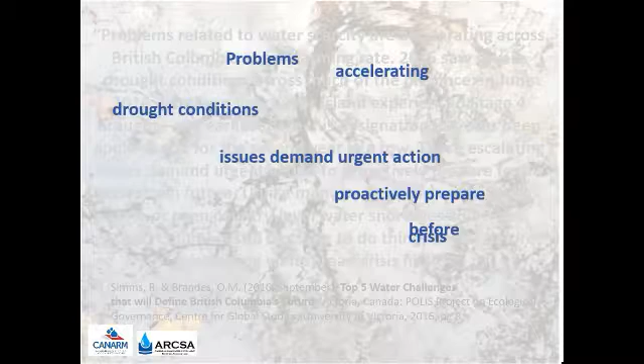The POLIS Project has just published 5 water challenges to define British Columbia's future. I've taken a paragraph and it talks about the problems, drought conditions, issues demanding urgent action, being proactive and preparing for the future, before there is a crisis situation. And so all of these together are kind of the focus of my relationship with rainwater harvesting and how this fits into the POLIS Project. Now the top ones here, that problems are accelerating, there's drought conditions, these are obvious and noticeable. Everyone talks about it, it's in the news, it's everywhere.

When we look at the issues that demand urgent attention, we can sometimes say, what can I do? What should we do versus what can I do? And then there's not just I, but what about we and what about they? And all of these different forms of the question come up. Then we also ask the questions, what do we do? What do we consider? What do we need to know yet and learn? All of these things kind of come out of that. The issues demand urgent attention and action, but where do we go from here?

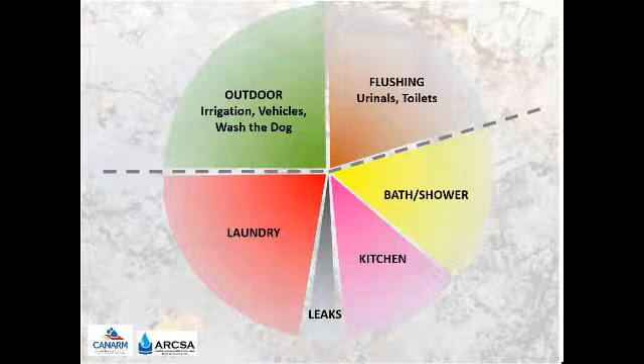And yet there are things that are happening. This conference on Living Waters Rally, the Watersheds 2016, Rainwater Day at the CanWest, the legislation changes, discussion and education, these things are underway. And we're looking now specifically at the new rainwater industry that is developing awareness and education, training, accreditation, and certification in this very, very specific area of expertise. We're going to start with the knowledge that roughly half of our potable water currently goes to outdoor use or flushing, and we can change that by using rainwater to fill that.

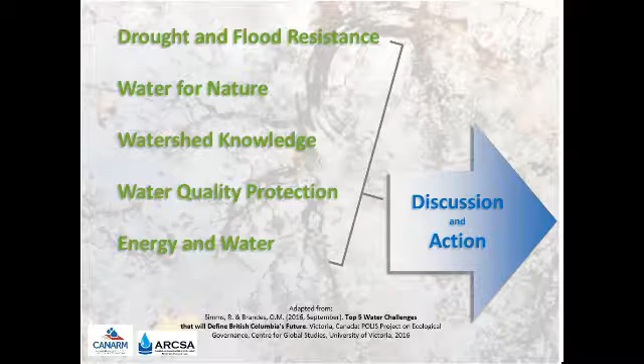One of the things we have to face is that there are many, many groups, many different aspects, many different facets and faces to rainwater harvesting, and it just covers so much ground. That makes it complicated, and being able to work within those regions, within those rules and regulations, to help develop new ones. And as the POLIS Project breaks down into 5 main topics, leading to discussion and action and leading into the future as they have been doing over the past while, it's really, really good to see how this is developing. I want to make the case that rainwater harvesting will directly address 3 of those areas for sure. The insert says it's rainwater harvesting.

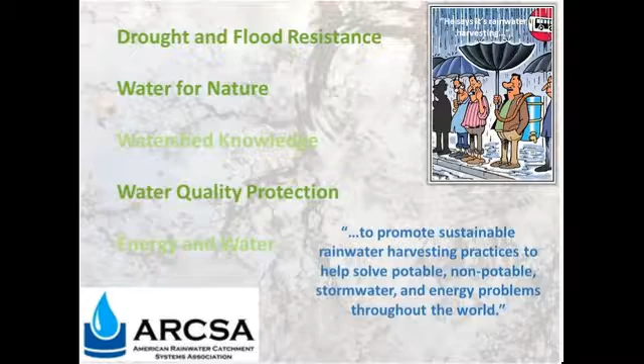We have organizations. One I work with is CanArm, Canadian Association for Rainwater Management, bringing awareness, educating, conducting research across Canada in rainwater harvesting and best practices. So this is kind of the north of the border aspect. The south of the border aspect, but also international, is the American Rainwater Catchment Systems Association, promoting sustainable rainwater harvesting practices. And they are leaders. They've been doing this for over 20 years. And so we're working with them to bring education and training here into Canada.

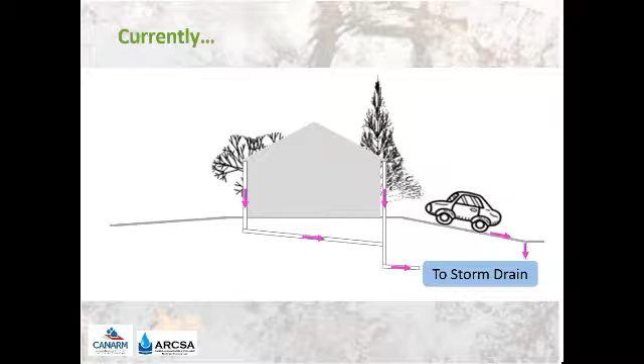So where we used to have pristine nature, we have now modified that dramatically and taken what rain falls on the land and on our roofs and put it into the storm drains and pushed it off someplace else. Rainwater harvesting wants to address the drought and flood resistance aspects by saying, let's interrupt that flow from the impervious surfaces and runoff going to the storm drain. Let's interrupt that and put it into rain gardens. Let's use pervious pavements and put that water back into the ground. When we consider that, there's also, in the landscape sense of things, using less water, conserving. Using drought-tolerant plants and using no lawns, or letting lawns go dormant, not using as much water. For rainwater harvesting, specifically in those areas, one, it's an alternative source.

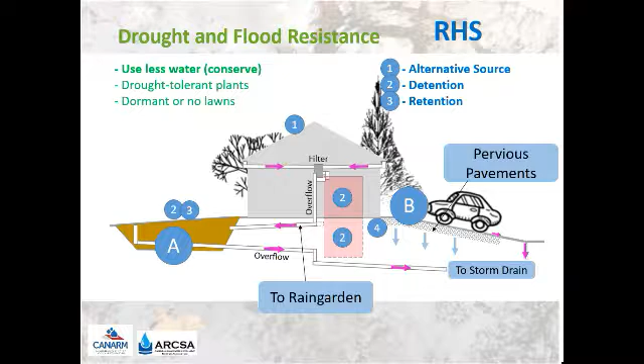Two, we can practice detention, where we're holding water back on the site and not rushing it off into the storm drains. And three, retention, where we're putting it into the ground. Now, further to this, we can also add cisterns or tanks above ground or underground and use that same type of system, store more water for later use when we don't have the water available to be used for the various aspects we want to. This way, we're improving also on the detention aspects quite substantially. Rain gardens do as well by absorbing water like a soil sponge.

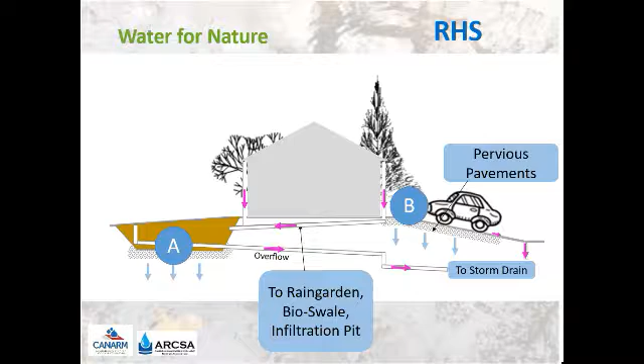Water for nature is another aspect that we could look at. The pervious pavements, of course, and the infiltration into the ground. Planting trees is a great way of keeping water in the environment rather than pushing it away someplace. It goes back into the environment through evapotranspiration. Trees also, and plant material of any kind, really helps water get down deep into the ground. Mulching planting beds so we don't have evaporation, using sheet flow and on-site infiltration. And of course, evapotranspiration is big because nature's cycle is water going into the atmosphere and then coming back down onto the built environment and the natural environment.

So again, we have the alternative source. We have detention, retention, and infiltration in many different manners: rain gardens, bioswales, infiltration pits, and pervious pavements. The overflow, of course, goes to the storm drain or to some other storm system that has already been there and usable. Also, again, tanks can be added.

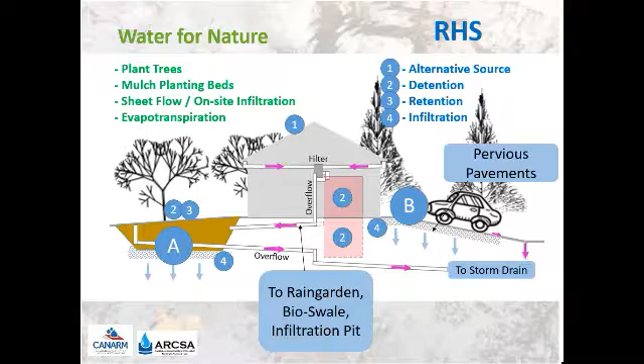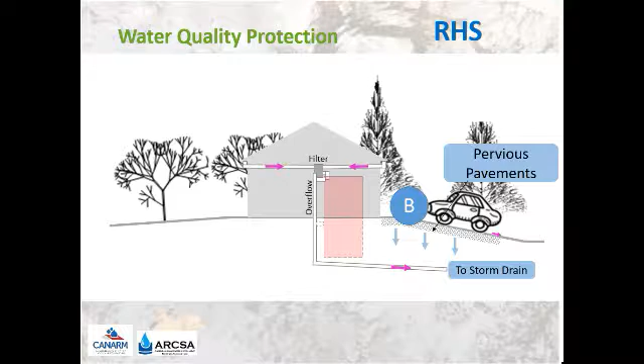When we look at water quality protection, the water in the cisterns is treated slightly, filtered, so that it's pure and clean as much as possible. That allows it to sit for a long period of time, and that protection just keeps it clean. In the landscape, we can eliminate chemicals. We can reduce runoff volumes. Again, the pervious pavements are a good option for that. We still have our alternative source, so we're not using potable water.

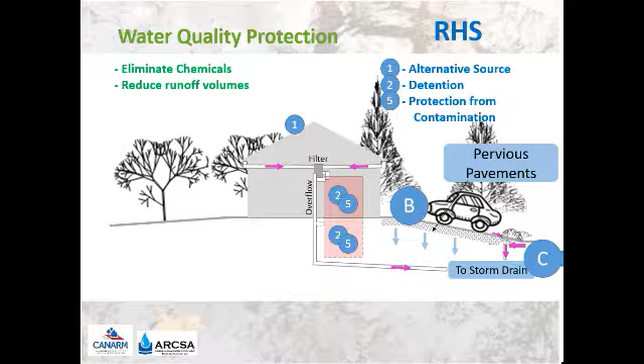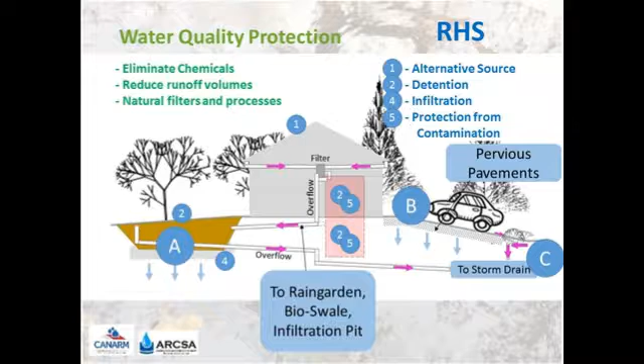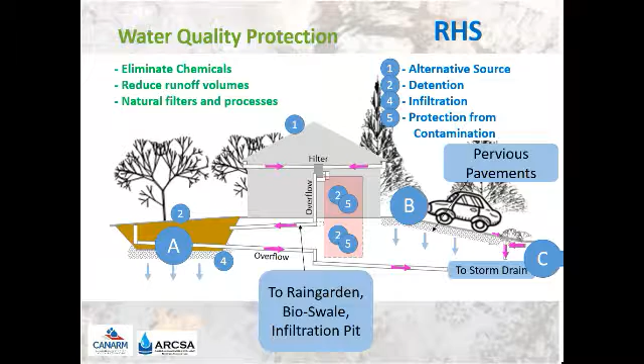We are detaining the water and protecting it from contamination, and then also we can go on further and we can use rain gardens, bioswales, infiltration pits, and get the water back into the soil. But we're managing that water, and we're not allowing it to receive and carry with it contaminants that are bad for the environment.

There are other uses, too, for rainwater. As an alternative source, the detention factor before it goes into the storm drain, just by itself, stormwater management. And then other uses such as irrigation, flushing, fire suppression, potable uses, and so on. There are even more in a commercial sense or an industrial sense.

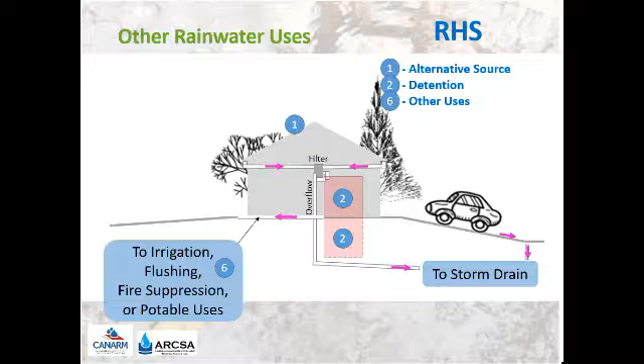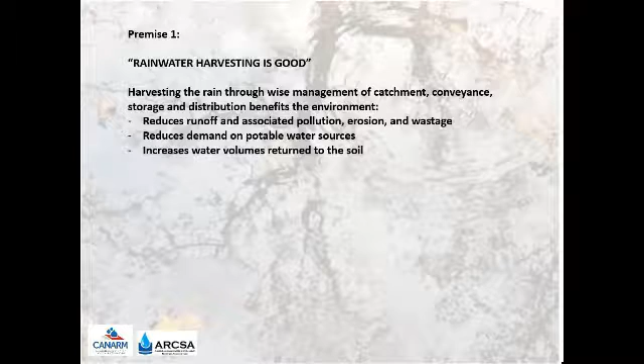So there's a good case, I think, being made for rainwater harvesting, the wise management of the catchment, conveyance, storage, and distribution, which can overall benefit the environment, reducing runoff, reducing associated pollution, erosion, and wastage of water, reducing the demand on potable water sources, and increasing water volumes returned to the soil. There's a good case for rainwater harvesting then being one of the opportunities to work towards meeting those goals that are challenges for British Columbia, but elsewhere in the world as well, and particularly across Canada and most urban centers.

Premise 2 is that this is a specific area of expertise. It crosses over multiple trades and professions. Even though it's as old as human habitation is, people have been doing this for ages. It's not rocket science. We've pushed it aside and centralized and controlled our water supplies and our distribution and collection of water on the way out, wastewater. Best practices for rainwater harvesting need to be applied. It isn't just anything goes. There are better and best ways of doing things.

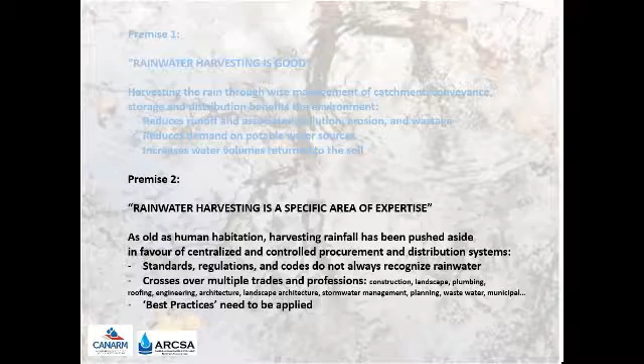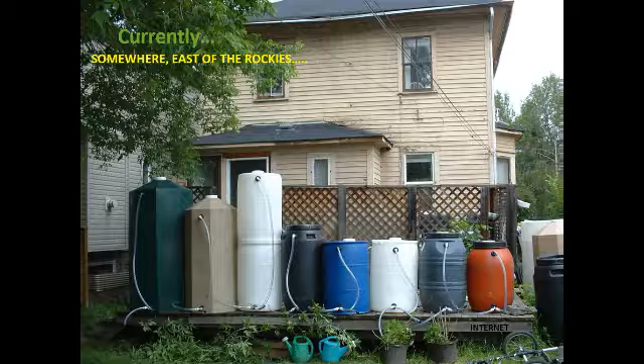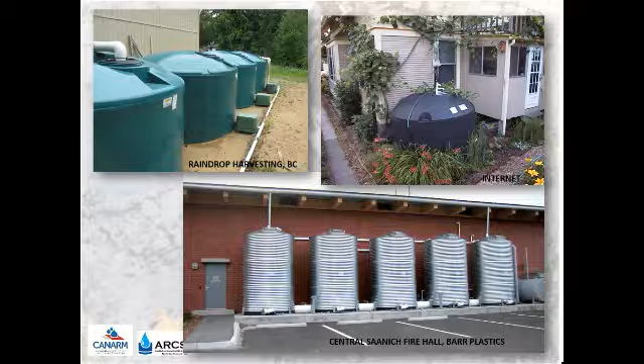So let's look at what exactly a rainwater harvesting system looks like, and there are a number of examples out there. This being one that perhaps is a little funny to watch, interesting. I think it does work, but it is not what we're talking about. Here we see some more commercial and residential aspects, and they are substantial. So the large tanks on the upper picture and the bottom picture collect a lot of water and store a lot of water. In the residence there, it's not just a rain barrel, it's a cistern, it's a tank that allows much more water to be stored. And it comes in all sorts of shapes and sizes. This one, I believe, is out of the UK.

But where do we start? The American Rainwater Catchment Systems Association, almost a year ago, published their first rainwater harvesting manual. There are 10, maybe 12 now trainers approved across North America. There's an instructors group that manages the operations of what is being taught and how it's being disseminated. There's an education committee under which this group operates. There's an executive director and a board of directors that manage the whole overall operation into which education fits.

In this program, the Accredited Professional AP workshop, the 2-day workshop, the course of study includes such things as supply and demand and pumps and controls and catchment and conveyance on rooftops, extreme conditions, hydraulic calculations, and on and on. You can see the list there.

In addition, there is climate change, there's regulations, codes, standards, guidelines, the best practices which are outlined to say this is the best ways of doing things based on practice, but also based on the knowledge that we need to protect our environment. What about data sources, and where do we get the information to design and build these systems? What about the networking through the organization?

And then on to accreditation and certification, which means individuals are aware of and know what they're doing. At least they have been tested to a certain extent to understand and to know those things. The process of design in landscape or in building a car, or designing furniture, all the same. And so the process of design in rainwater harvesting that is used is very similar. A system overview, a site analysis, a design principle, design approach, and then specifications and an owner's manual.

But the first section really is answering the question of why. The aspects of the rainwater harvesting system to be considered, its feasibility, its initial calculations, what is the meaning of it? And I don't mean to use the word what there because it comes later, but are we doing this for irrigation or for flushing or for laundry or for potable service purposes or for fire suppression or stormwater management is really the why, because it leads into so many other things such as the what.

The what is the natural and man-made structures. It considers now climate and the soils and the slopes and neighboring sites. It considers what will work and what won't work and what types of systems, because there's more than just one type of system to work with. And the what is kind of the details of the concept of all the parts and components in a kind of a larger scale. Has it got tanks, or are we going to use bigger cisterns?

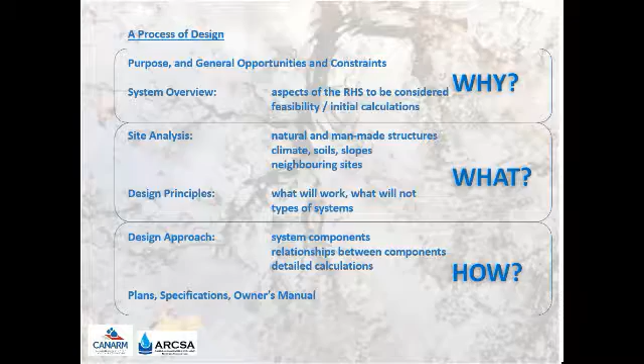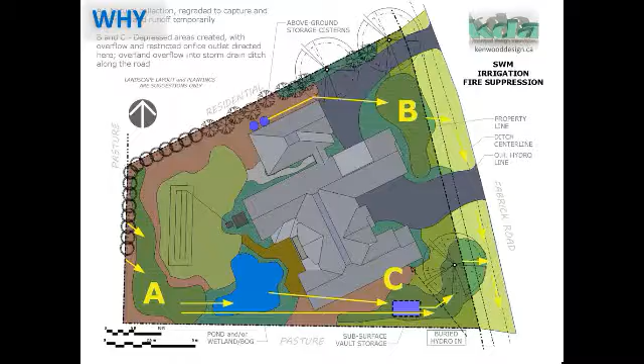Starting on the left at the bottom, the runoff, overland runoff, is captured and carried through a pipe to the storm drain at the very front. There is no overflow then because it's carried out to the front. It doesn't flow across the property, and stormwater flow that way is curtailed. But what soaks into the ground, because the finish grade is changed there and it creates some little berming, that water can go into the pond.

So in the pond is a wetland area and a pond area. It's not a swimming pond. Water from the roof also goes into it, and it's great storage, and it's for fire suppression. Further down, off the back of the roof and off the front of the roof on the one end, goes into the buried vault. At the other side of the building, we have a cistern storage for irrigation. It's hidden here in this view.

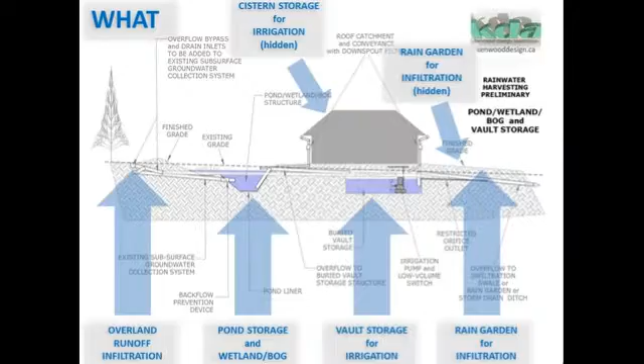The cisterns then overflow into the rain garden at the front. And on the front rain garden on this side, which is overflow from the pond and overflow from the vault, those things combined. And further at the back of the property, I should say back from here, the front edge way behind us, the next residential lot, a rain garden for infiltration there too. So those 6 systems are all kind of individual and separate. But this is where it starts, at the roof.

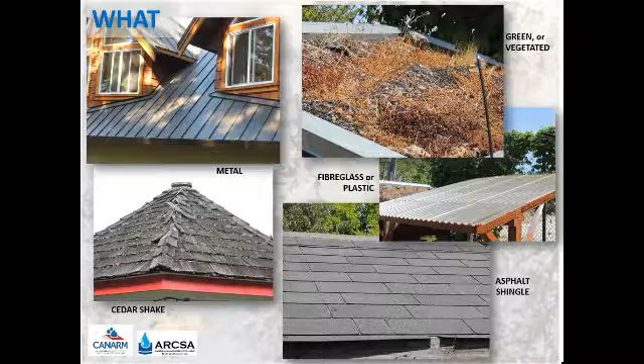So when you look around, there's all kinds of different roof surfaces to deal with, some better, some worse, some not good, and we evaluate all of those in the training program. Same as we evaluate what is the reason, why are we doing this, as we did in the previous slide, what have we got to work with, where are we starting. There are questions such as, which would you rather have your rainwater come off of? What kind of roof is it that you look at?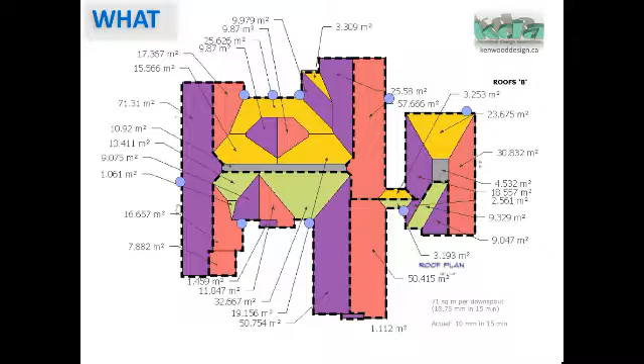Every roof surface is sloped to go to a gutter. The gutter goes to a downspout, and only so much area can be handled by an individual downspout. So all these areas need to be analyzed, and the number of downspouts, their positioning, and their connection then into the rainwater system needs to be analyzed. This is part of the what.

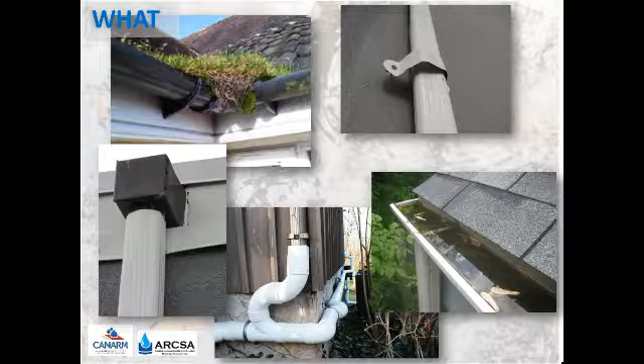When we look at those connections in the gutters, gutter gardens, gutter soup, we look at scupper systems, we look at different arrangements of piping and how the water flows. We look at how these things are attached and what's existing, what needs to be repaired, what needs to be updated, and then perhaps what can be done, how things could work.

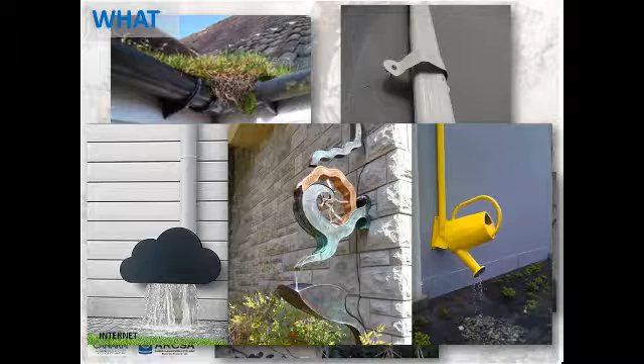In the center, that water wheel actually does turn when there's rainwater coming down the downspout. The one on the right is kind of whimsical. It goes into a rain garden. On the left, I'm not so sure about it. Why is that water at ground level just kind of sitting there? It should be probably going someplace, unless that's pervious pavement and it's soaking it up and taking it someplace.

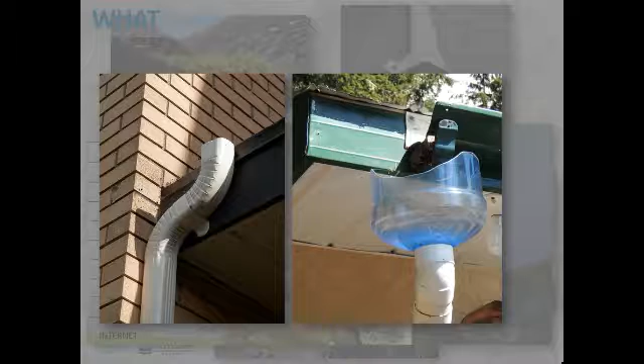And then there are the anomalies. On the left, I've watched that downspout for 4 years, and it does collect a few drops of water every year. On the right is a real system, unfortunately jury-rigged, homeowner modified to lead into a cistern that is used for potable use only because there is no other water supply in this area. So we talk about the good, the bad, the ugly.

Going through calculations like these is so important to give us a starting place to say, here's where we're starting from. Here's what we can meet, here's what we can't meet, here's how we can meet the demand, here's how we can fulfill the obligation of why we're doing this, and then we can start to say, okay, well, if budgets don't allow, let's maybe incrementally do this over 2 or 3 years or seasons and deal with the more pertinent details by having some figures and facts to work with.

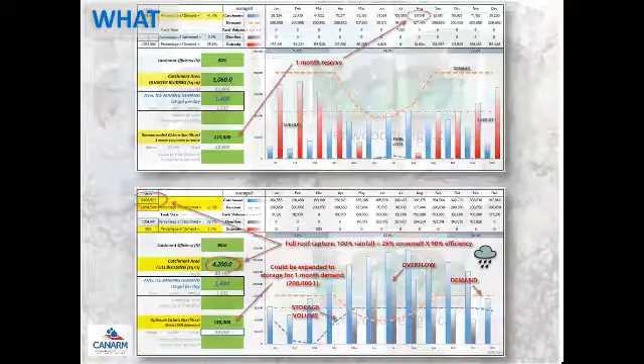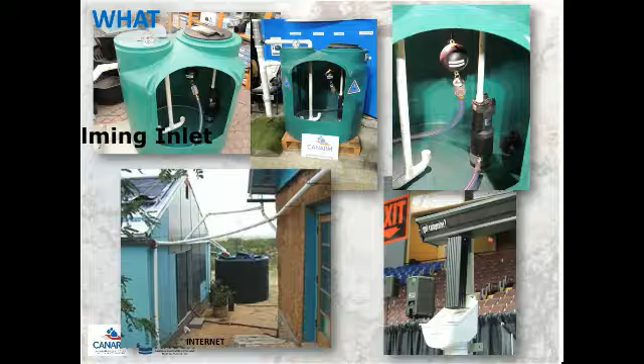What goes into the tank? Very important. We can see the top left there quite clearly, the upside down T shape. That's a manner of slowing the rainwater down so it's not pushing on the base of the bottom of the cistern or the tank and stirring everything up. And we have also beside it a floating intake so that the intake is just below the surface of the water. In the bottom right, we have filtration coming in from the gutters, and that takes out leaves and other things like that as well.

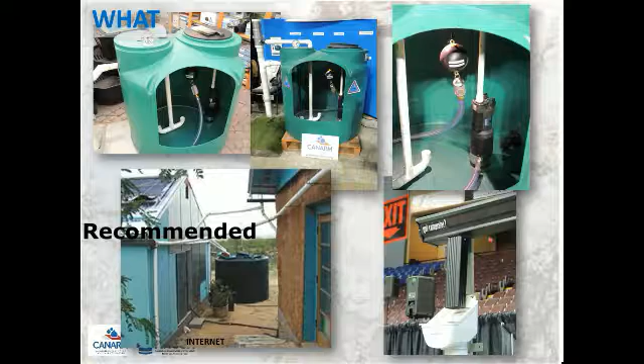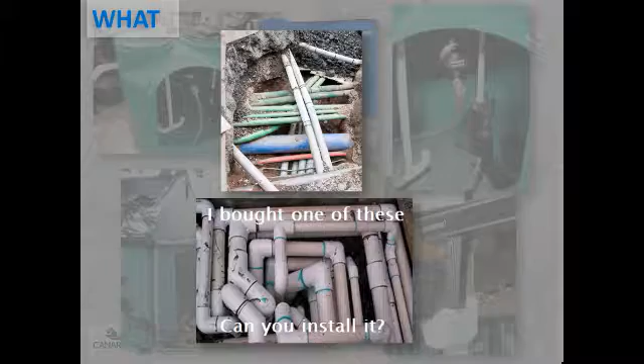The bottom left is kind of what we try and avoid because it's just a spider web of lines and stuff that's going to get into trouble down the road. Being able to plan and design things ahead of time makes more sense.

Here's a system that is for irrigation. So this is kind of the how now. This is the details of how things are going together. It's got 105 square meters. It's got 85% efficiency factor being a flat roof. It's probably a little less efficient than it would be on a sloped roof. About 80,000 liters per year, annual, potentially.

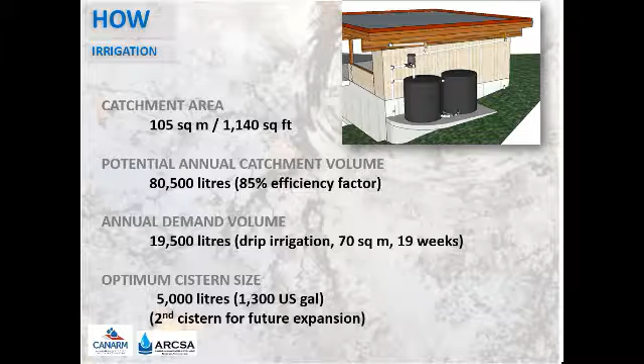We need 19,500 for drip irrigation over 19 weeks. And so the optimum cistern size is around 5,000 liters. And you'll see 2 cisterns there in the image of the top right. The second is for future expansion of the irrigation area.

This one here is for ice making. Potentially 3.3 million liters can be caught at a 90% efficiency factor, which includes 25% of the snow melt. With climate change, it's been recognized over the past 10 or 15 years that there are many more thaws during the wintertime, and that water can be utilized rather than it just being frozen from November until March.

The annual demand is a little over 2 million liters, and 250,000 liters, 65,000 US gallons of storage is the optimum size. That means we could go less and have a little bit of subsidy, or we could have bigger storage, but there's no sense to go to bigger storage because we really don't need it for any reason other than perhaps emergencies, and perhaps if they wanted to add flushing to this in the future, then we could look at enlarging the cistern size.

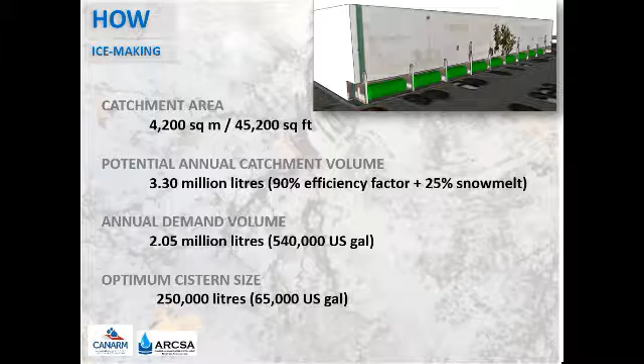Another one in irrigation, it's got 90 square meters of roof capture, not the entire roof. They can capture with this part of the roof a little under 48,000 liters, and the annual demand is 57,000 liters. Now this property has no grass, all gardens, and a few chickens. So this is one of 3 tanks that will meet most of the demand in this particular area.

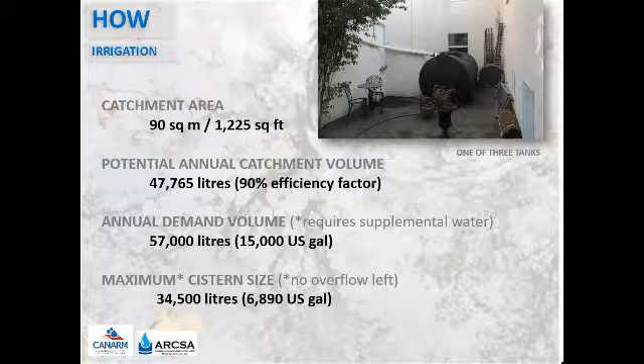The cistern size we need to meet that 57,000 liters, which actually in this case the maximum size we can go is 34,500 liters. There's no more overflow left. That's the biggest tank we could put on here. There just isn't any more water falling based on climate factors and climate data that we have.

This is 100% potable, this system here. It's 114 square meter roof, 145,000 liters, 90% efficiency, a really nice new metal roof. Annual demand volume for the residents, 111,000 liters. And the cistern size, 26,500 liters. And that goes through a filtration into the tank with overflows.

It is pumped out through a pressure tank and then through filtration, 20 micron, 5 micron, and UV light, and then into the residence. And from there, it is utilized in dishwashing, at the sinks, the showers, laundry, and anything else they need to do.

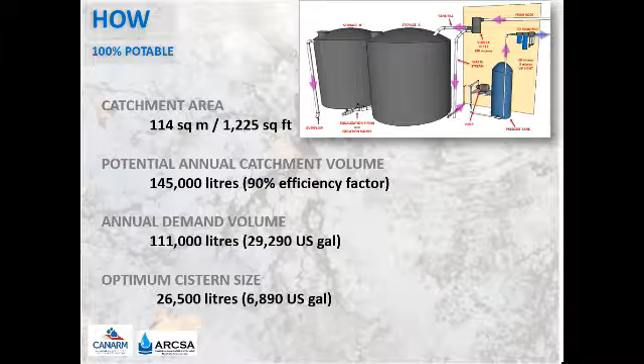This is irrigation, emergency, and fire suppression. It comes off a 185 square meter roof. Potentially, we can gather 167,000 liters. The annual demand is around 91,000 liters. That's for irrigation only.

So when we calculate that, we have to add storage for the irrigation, 45,500 liters. We add 5,000 liters for emergency. That means 1 week's worth of water for the house, which needs to be brought up to a potable level, but it has its own separate storage. Another 20,000 liters for fire.

That's for 1 hour of fire suppression exterior to the buildings with large sprinklers specifically designed for firefighting that they can move around from different spots. This is a rural site, and it's prone in this area to summer droughts, and they want to be prepared for fire suppression as well. So a total of 70,000 liters of storage.

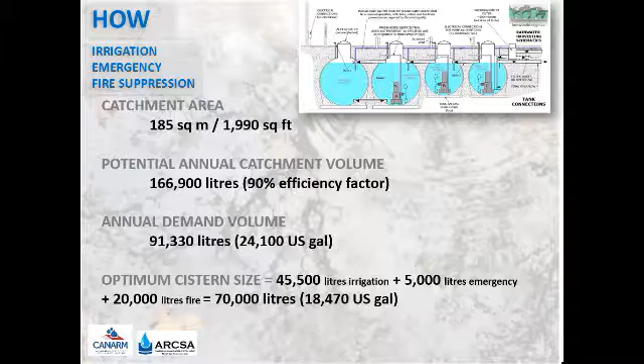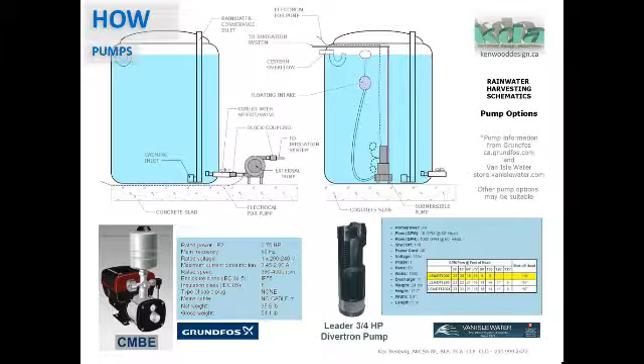Further on the how, things like pumps, and knowing whether we're using exterior pumps or internal submersible pumps or jet pumps, these different types of things, and who to get on the team who knows pumps, a pump supplier, of course, as well as other suppliers, people who supply the tanks and the other fittings and all the other paraphernalia that goes along with a rainwater system. That becomes the team. The team may also include engineers. It may include municipal people for permissions and those types of things as well.

So the education and training is, I believe, proactively preparing and helping get ready before there are crises. When we look at the problems, we have to understand weather versus climate and how those things are different, and yet they tie so closely together. We have to look at infrastructure problems and why we are where we are and why problems are there and how we can maybe look at things differently in the future. We have to look at policies and standards and what's existing to say, can we do it better?

With the issues, it's more than just I, it becomes we. And that's why the associations are a great place to be. That's why it's good to work in groups, and there are many, many small groups out there doing many things to set the best practices. Standards is the job of the associations. ARCSA has done that and is working on that, and so CANARM is bringing that to Canada as well, and working with other agencies along with it.

We're bringing awareness, we're bringing education, training, and then the accreditation certification program that comes from ARCSA. We're distributing that and helping along here in this part of the country, this part of the world, to bring it forth and to make it really front and center. So the Accredited Professional is a 2-day workshop.